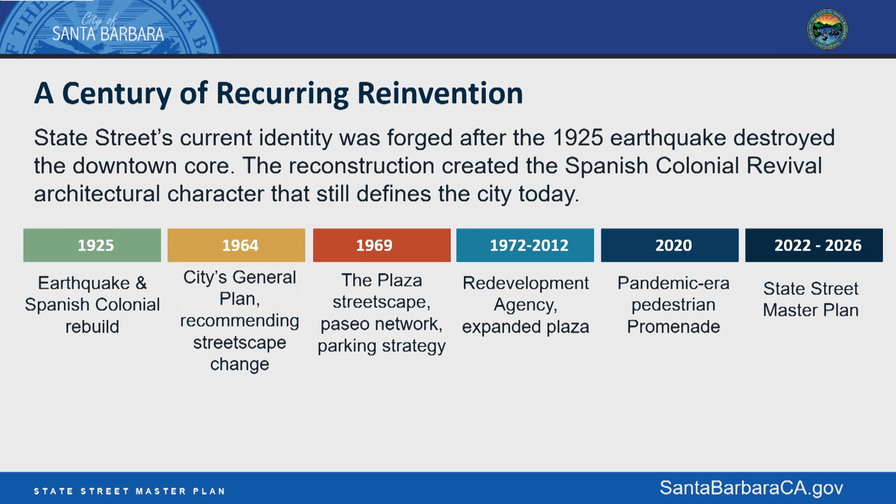We changed it again in the 70s and 80s when we expanded the plaza two additional blocks, Cota to Haley up to Ortega streets. And there have been changes since then, during COVID-19 and with the promenade that you're seeing today.

This plan really is looking at what is the opportunity for the next 50-plus years for our community. How can we design a space that can be accommodating for us right now and for the future community, and for things we may not be able to fully understand in terms of how people are using the space.

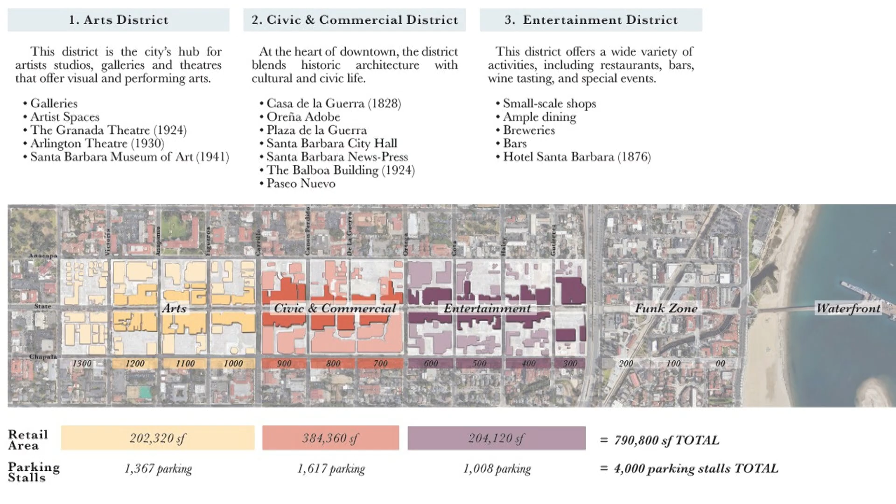Let me try to describe the typical sectional solution we're foreseeing for this project. An architectural section is a drawing that cuts vertically through a plane—imagine a drawing with a cut through two buildings on the side and a cut on the street at the bottom, the sides of the buildings continuous with the street in a U-shaped pattern.

The middle of the 80-foot wide street is taken up by two emergency lanes that are 20 feet wide. This is a necessary feature of the street, as it would be for any other street of its kind, in that it provides emergency access for fire and police.

What this does, in this particular version of State Street, is allow us to have two pedestrian sidewalks that are 30 feet wide on either side. We see this way of circulating as being controlled by electrically operated bollards.

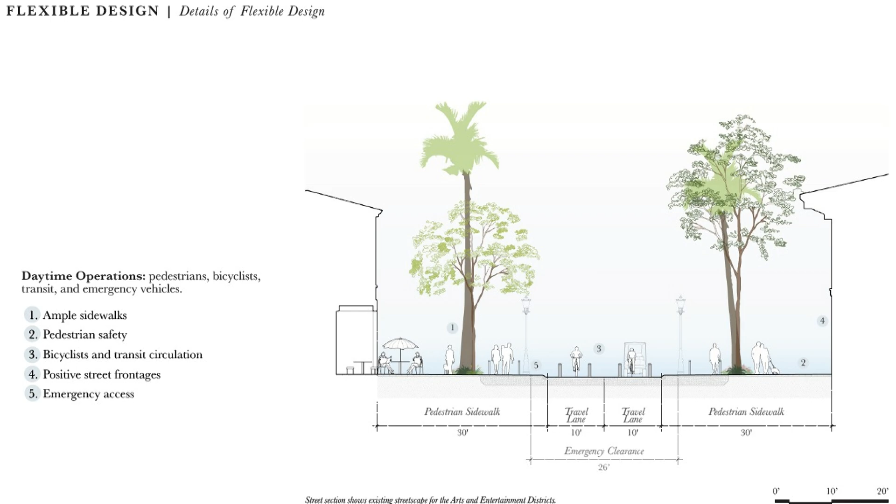There are four bollards spaced five feet apart on this 20 feet of street in the middle of the block, and the existing landscape stays where it is for the bottom three and top three blocks of this project. It's replaced by a new canopy of trees in the middle, and perhaps a new treatment of the ground there as well, as a way of articulating the destination importance and the cultural importance of the center of the city in the life of this community, and more generally its importance in California and in the country as a whole.

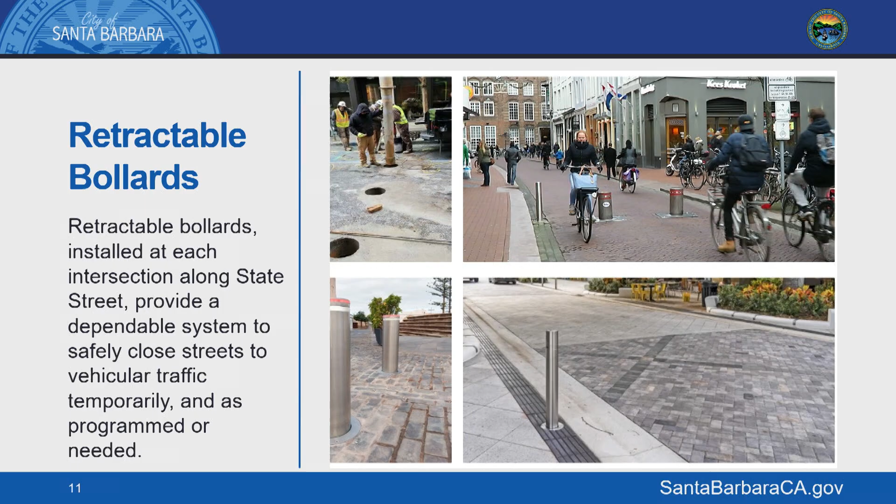Retractable bollards are not uncommon—it's a pretty dependable system of controlling traffic, both here and abroad. These are resistant to collision up to 25, 30 miles per hour, and are important for controlling and securing streets as they move between pedestrian-dominant times and service or other vehicle use times. The system we're suggesting is really a flex system by which the street is sometimes open to traffic and sometimes not.

It's important to note that on all blocks, the sidewalks are pushed out to almost double the size of the sidewalk on either side of the central 20 feet of lane. On the 3 blocks at the bottom and 3 at the top, we are proposing that we keep the existing landscape, renew it, refine it, and remove some of the base barriers to make for a more horizontally accessible and open landscape, wall to wall in the street.

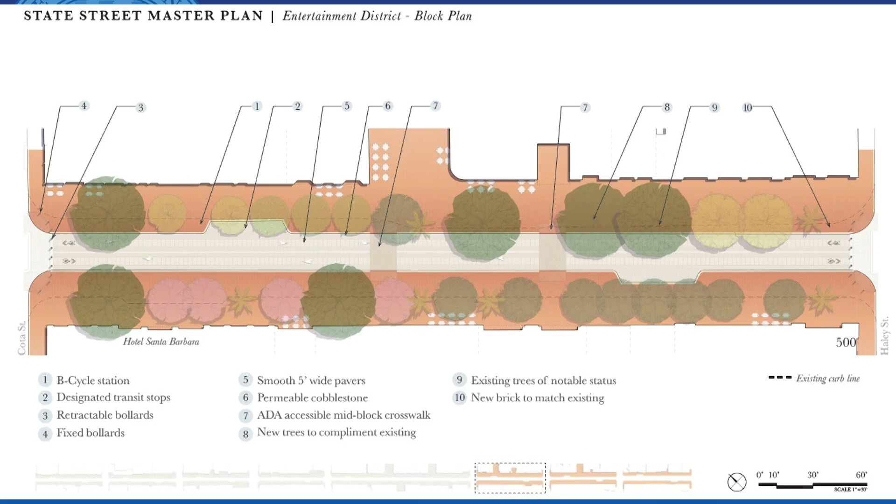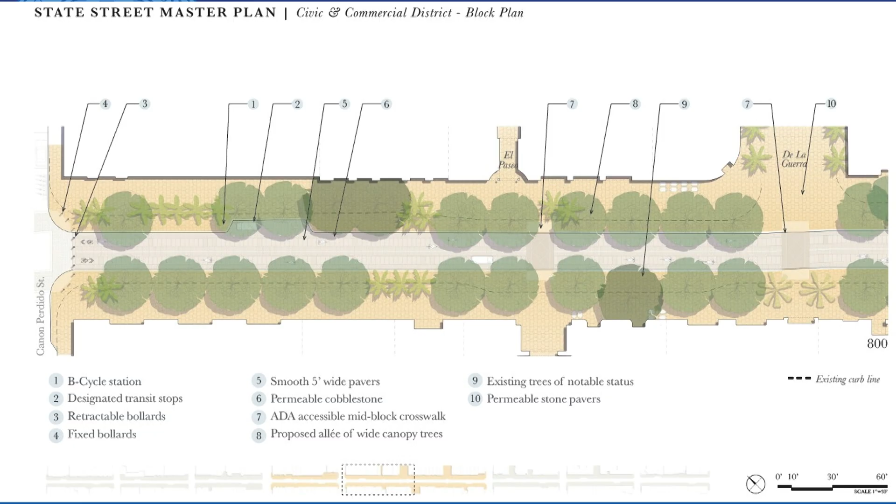In the middle section, we are keeping some of the important landscape features that are commanding, mature and extremely important, and then putting forth a canopy of sycamore trees, which will provide enough shade in the summer to really make the street usable, probably within a 10 to 15 year period of growth.

And then on the third section at the north, similarly, the sidewalks are enlarged. You can see provisions for outdoor dining and a landscape which continues and refines and regenerates the existing horticultural condition.

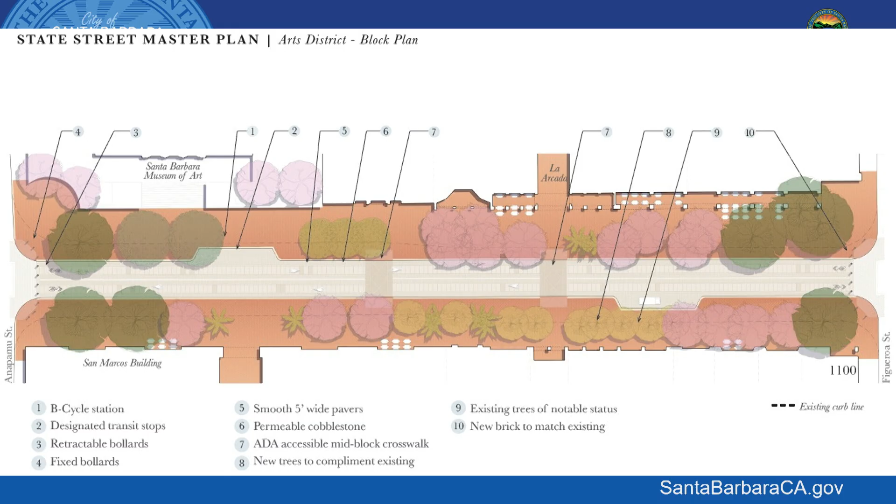There's also one parking space for transit on each side of the street on all 10 blocks, and a total of 4 crossings, 2 at the ends of the blocks and two in the middle. So there's a total of 4 crossings from side to side. The intention is that as much as possible, people should be able to move from one side of the street to the other.

I didn't tell you, but we are also trying to minimize the discontinuity of the street from the perspective of curbing it. So we're thinking about rolled 4-inch curbs as opposed to 6-inch vertical curbs, and also paving, continuing the existing paving on the sidewalk in the north and south blocks, and in the center blocks probably paving it in stone.

The street itself will be paved in a way that differentiates between the place where bicycles ride and where perhaps wider use by vehicles might happen on the sides. Any change of material would involve the use of materials that are equally non-slip, in order to make sure that people can operate and bicycles can work their way across and along this path safely.

The north-south paving for the middle 20 feet is going to be significantly different in its definition than the sidewalks, so that one can distinguish the places meant for multiple use in terms of modes, as opposed to the ones that are purely pedestrian.

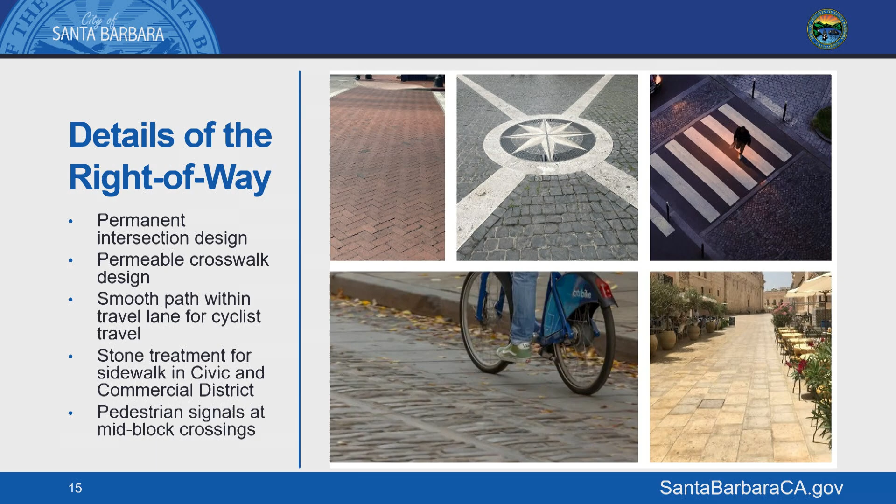I spoke before about removing some of the undergrowth. Part of the growth that is very prominent today at the base of trees is there, I think, planted in the 1960s to make sure people were protected from moving cars, because there was no parking to protect them. I think this has grown into a barrier now, visual and otherwise, to access from side to side, almost along the entire street.

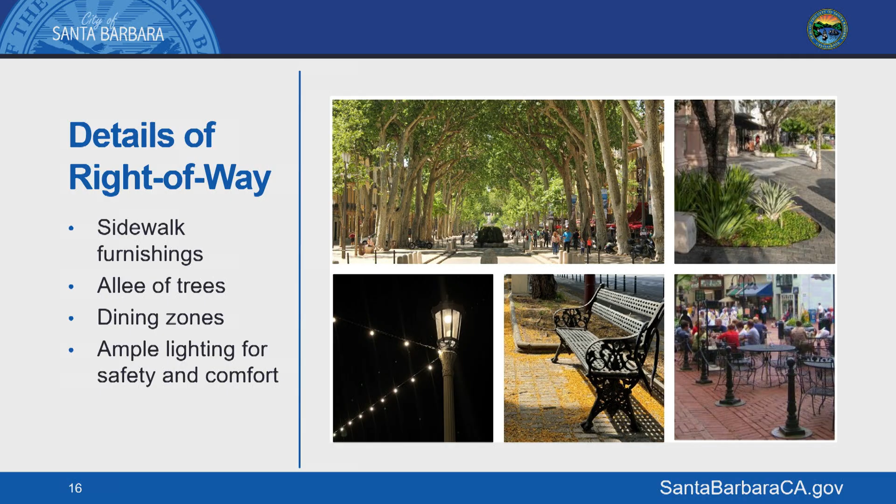There's going to be a provision for proper lighting, both broad lighting and lighting from stores and so on, sitting arrangements, and proper definition of dining parts of sidewalks.

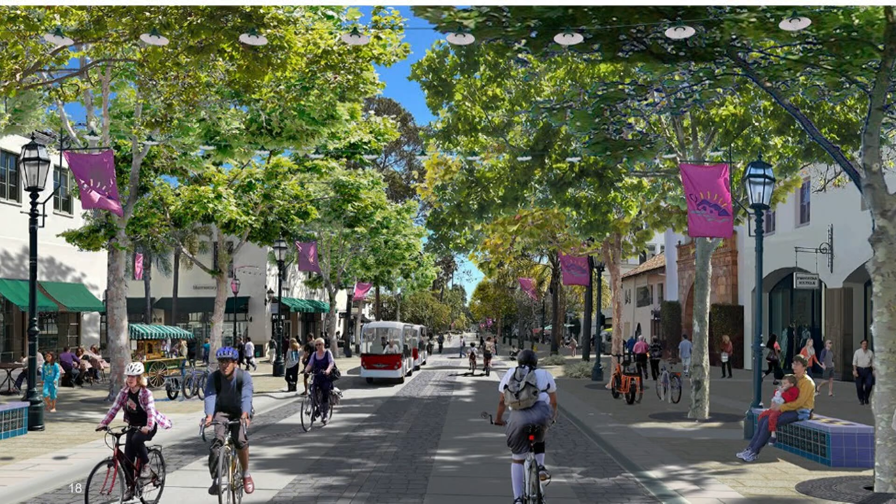Our hope is that based on what we are suggesting, we would transform it as you see here, and I would like to describe this to you: an ample canopy, a particular distinction of the ground plane into zones of circulation, divided both by bicycles and non-bicycles, and also north and south movement.

On either side of the central portion, there are zones of transition: 3 feet for possible parking override in case some emergency vehicle has to park there, for opening of doors and things like that, then 4 feet for bicycle storage, art, sitting, etc., and then a sidewalk of virtually 23 to 25 feet for both sitting, dining and walking.

You can see in this image that the central portion, out of the central 20 feet, has bicycles going up on one side at 10 of these feet, and on the other side another 10 feet with bicycles, and the corridor shared also with an electric shuttle. I don't think the shuttle needs to be exactly that way—I recognize shuttles can be friendlier in ADA terms, some more than others. The notion is that there ought to be a shuttle connecting all the way from the waterfront up to Arlington and Sola above that.

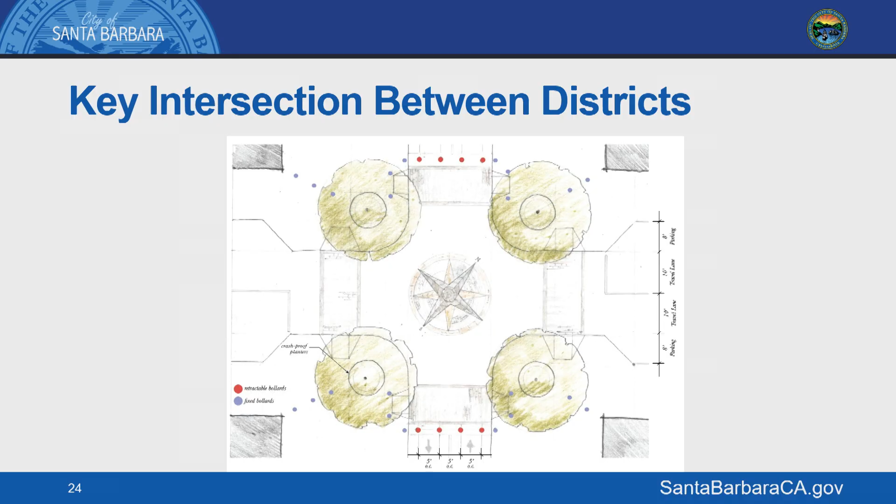Under serious discussion over a couple of previous meetings, we've decided to move the bollards forward to the other side of the walking path of the pedestrian crossing, as a way of stopping the temptation by motorists to turn and use that little nook in the street for dropping off or other purposes. There's going to be a lot of drop-off on the side streets as well, on all four sides adjacent to State Street.

As I said in the beginning, this has been 6 months of intense effort to talk to people at various levels, looking at this project with different ideas in mind, having thought about it in creative and different ways over time.

Our recommendation is really, from a design point of view, a master plan level recommendation - a way of resolving the big questions of balance between mobility, infrastructure issues, performance and retail performance for the corridor, and the very detailed questions of textures, of ADA performance across the board.

All of those things will be handled in detail during the next phase of design, which would really be schematic level design at every level. That's why I said in the beginning we could certainly answer any general question you would have about the scheme, which we think is the one that best accommodates the multiple kinds of demands and requirements for all kinds of issues along its way.

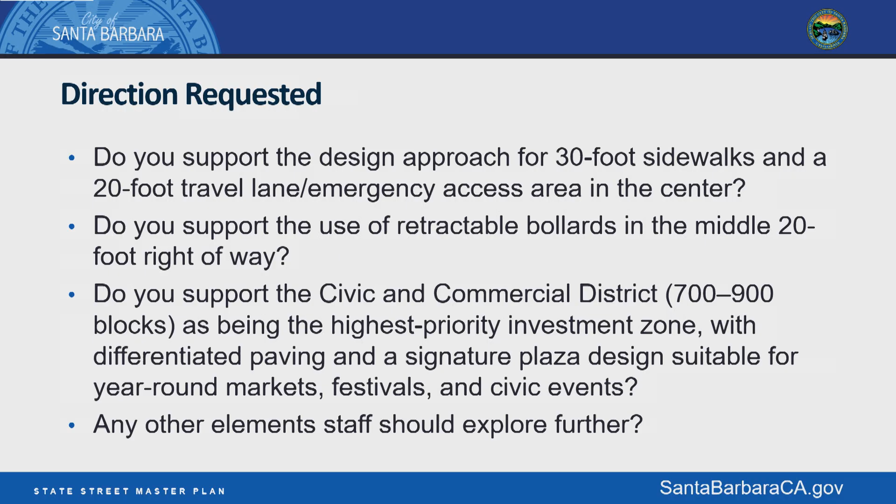So, from the comments that this woman made, I think Erin Duffy - are we going to have accessible parking on the side streets? Because if you're not allowing someone to be dropped off who may have mobility issues, how have you accommodated those needs? And having plan-checked at the city for 17 years, are you aware that some of the buildings actually go into the right-of-way or underneath the sidewalks? Do you have surveys of which buildings those are?

Yes, Chair and committee members, we are aware of the basements that are occurring in State Street proper. There's a number of them, so we have a general understanding of where those are now. There's going to be some nuances when we get into detailed engineering and construction level drawings, but that is certainly something we're aware of.

In terms of the parking on the cross streets, that's also something that we talked about further in the plan, and we haven't identified yet the actual feet of space, but we did identify having at least one accessible space on either side of the street. So 2 accessible spaces at each intersection, 1 on each side, all the way up and down State Street in this area. It would be great to get feedback from this committee.